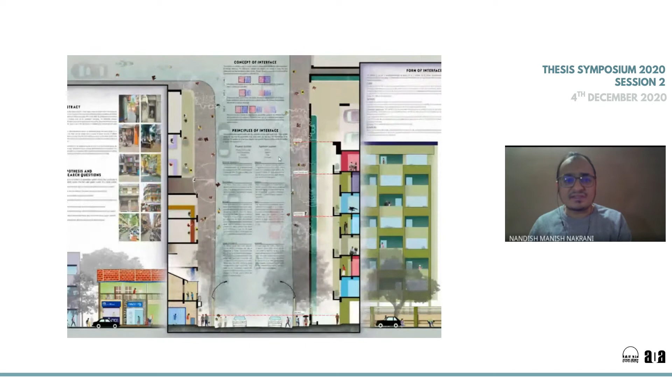The next step was to get onto a site and really understand what the ground reality is, and how we actually feel around this kind of three-dimensional space. So I went around a lot of areas in Mumbai to visit them and get a point of view of that space.

There's a set criteria which I had to narrow down to select the site. This criteria was to have diversity of various user groups, functions, architectural styles, and communities, and different eras of buildings. Also, it would be nice to have buildings that are recently developed alongside ones that are almost in a dilapidated condition, to see how that building is still sustaining.

It should be well connected to the city with various modes of transportation, having a good network, and also be a prime locality for the real estate market, so that it would help me add value socially and commercially.

One such region is the Girgaon and Kalbadevi area, adding on to it the Bhuleshwar side on the eastern side. I happened to visit all these areas over a span of about one month, walking on the streets almost every alternate day, getting to understand the essence of the site rather than just mapping things.

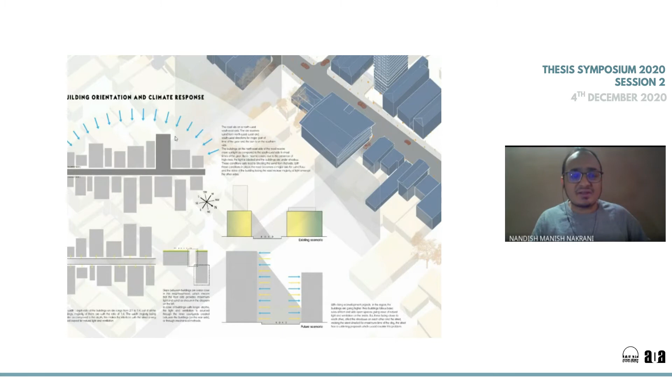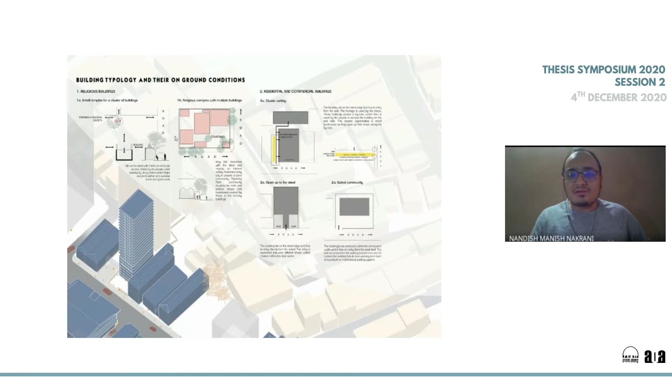So I conducted a few studies regarding the building orientations, because a lot of buildings there are quite close together and affecting each other in a very effective manner. I also looked at various typologies of the buildings, how their ground conditions are, how the clusters are, and how the building entries and exits work.

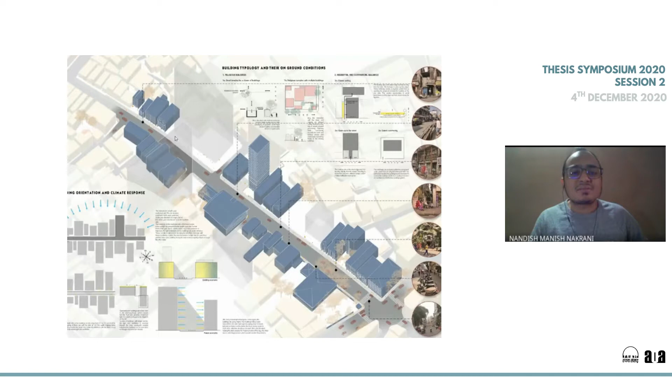And these are some of the visuals from the site. You can see this particular patch is a narrow street. It's a one-way road with not a lot of vehicular movement, but in peak hours there can be some congestion.

Adding on to it, some other characters of the site regarding the shops and temporary vendors, and the character of buildings on the ground and above the ground. I also spoke to a lot of people over there to get their point of view, like the residents, the people working over there, the pedestrians, shopkeepers, and the motorists.

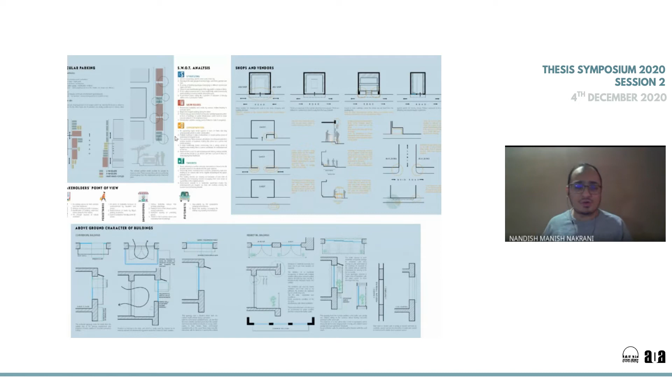The next step was to narrow down on what to do for the design, because up to this point I wasn't really clear about what the program would be or what the design would look like. This was during the end of the semester, and I really struggled to get to this point.

The main thing was to have an urban intervention on the street, as to how an interface would help add value to this site.

So I looked into the issue of road widening, because I was reading a lot about road widening schemes around the city, what their effect was, whether they were really effective, whether they really worked for the people, and how specifically it affects the interface.

According to my analysis, road widening is not actually a good idea to have a positive effect on the interface, but it really mellows down the interface and the activities around it.

So I went on to address that, and to look at an alternate for road widening, and how to add another layer of transit onto the street.

So the interface would be an element which would help with this, which was a bridge that would connect all the facades of the buildings. It would go along all these buildings along the street, adding another layer on top at 6 meters, clear from the ground, and all these activities could happen on that bridge connecting all the buildings.

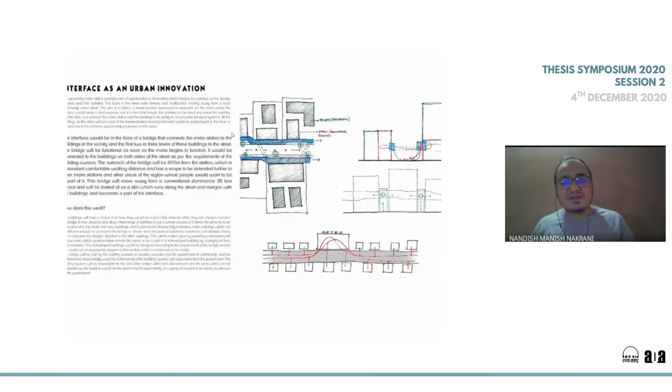So these were some of the strategies and policies which would work there, as to how the buildings would get into this particular scheme.

So how this happens is this bridge will particularly start as soon as the metro commences, metro line 3 commences. Till then, whichever buildings are redeveloping over there, which is already taking a lot of pace, these buildings will redevelop with this patch of the bridge with them, and this would create a stretch of this bridge on the street.

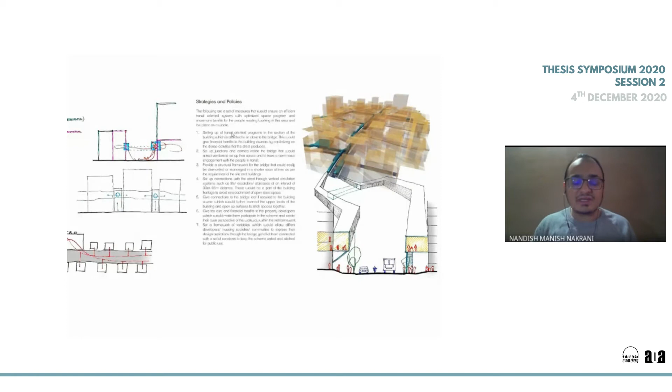And if the buildings do not want to redevelop, there can be some temporary installations or temporary connections. So the scope is around the Kalbadevi and Girgaon metro station.

And the analysis which I would suggest is a really important thing, the triple bottom line analysis, which would really help you to get into the basics of the scheme.

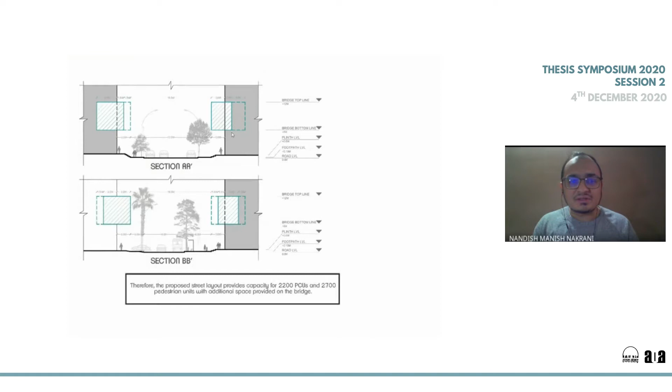There are some calculations which were required for sizing the bridge - what would be the width, what capacity it would cater to. And some of the constants which I myself, the designer, would set, and some variables which the user or developer would set, which is really important to give direction as to how this entire scheme would come up in this place.

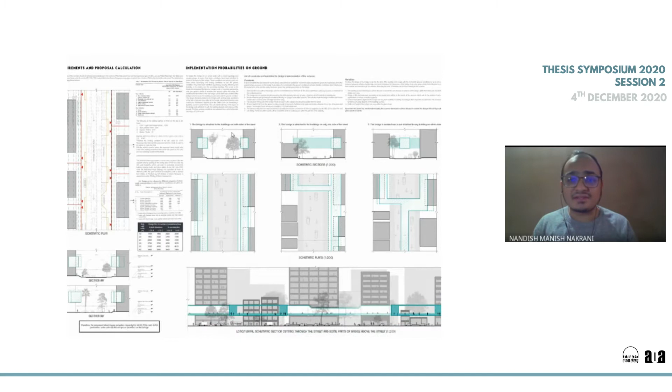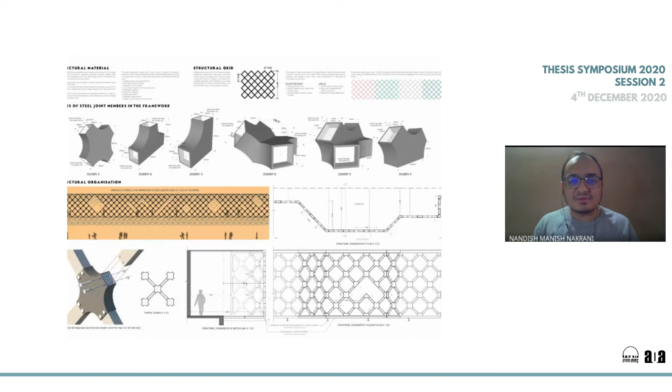The next part was the architectural intervention, detailing how this bridge would connect with a particular building on site. I thought of the site as a thoroughfare between two different lanes, and how I could create small lanes, by-lanes, and courtyards in between. In this patch between the two metro stations, new metro buildings are coming up, so this patch was ideal to cater to this situation between the main street and the rear street, acting as a thoroughfare in between, and also clearing out this spot for vehicular interchange for the upcoming metro station.

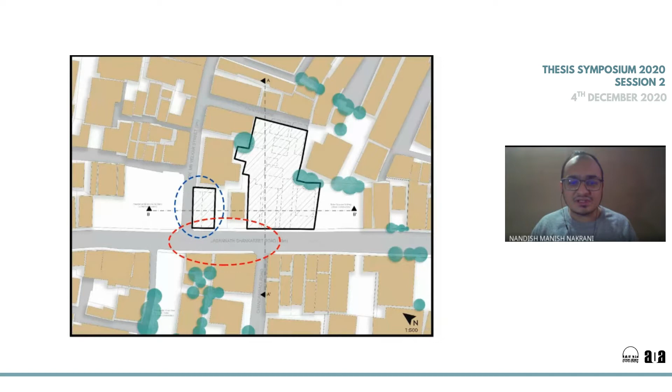This particular intersection was catering to a lot of pedestrian movement, because people coming from the top were going towards the station and vice versa, so this was a prominent junction. I had to redevelop a few buildings, take them down, and put up a new building there. These are the details.

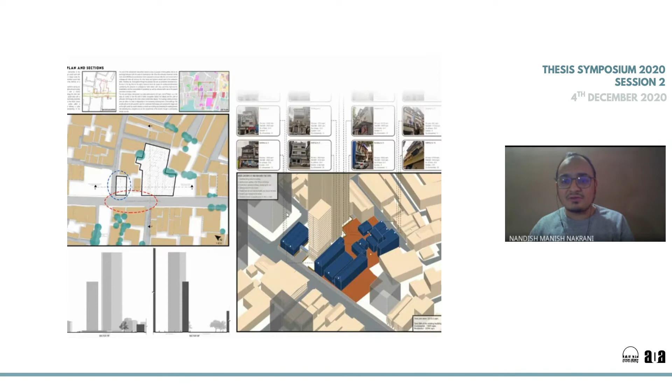The program was to have a clear idea of how and what I would do on site. If you're going for redevelopment, there has to be a strong reason, because redevelopment is already a big issue—people have divided opinions. So I had a good conversation with a group of residents to get their point of view, and set a framework according to their requirements, and set a few design goals carrying forward the principles of interface and my objectives of redevelopment.

Along with some zoning and massing strategy, the idea was to have internal interfaces, narrowing down the interface to the smallest occupiable space from the street, not just focusing on the two fronts which are there on the site.

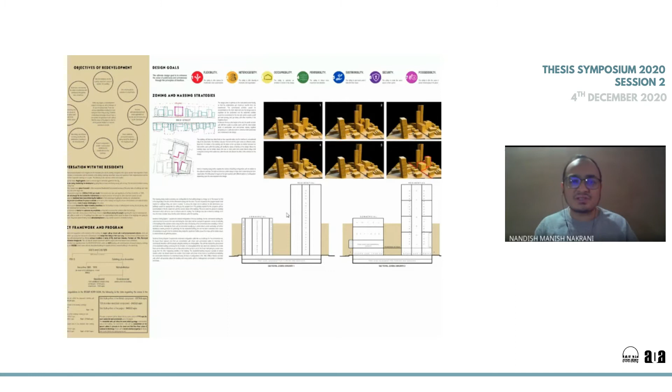The building at the bottom is a commercial building, and the building at the rear is residential. Having a commercial front on the main street, where metro station related activities would happen, gives them an advantage, while the residential building is in the rear part, which is more private towards the rear side.

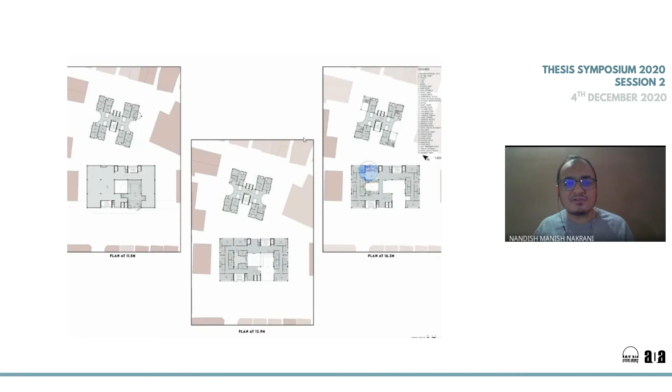A few more floor plans. You can see at the bottom the commercial building—the organization was to have terraces in between to break down the form and create interfaces towards the internal side, not just focusing on the external street side, and the same applies in the residential building as well.

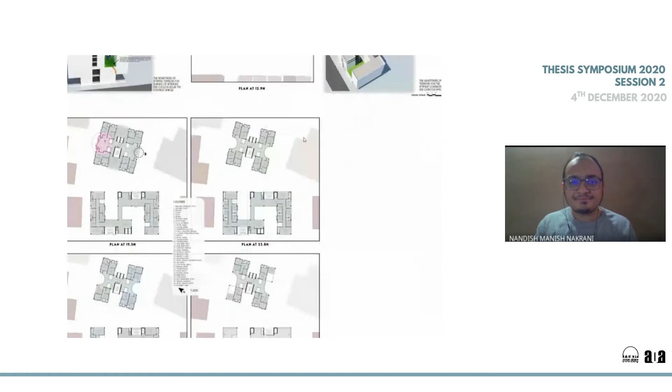A few details on the edges which would add value to the smallest of occupiable spaces. These are the floor plan units.

You could see the building in front on the main street—there's a bridge cutting through the front part on the first floor, where all the retail activities are happening. So on the ground floor and first floor, all these retail and commercial activities are happening for maximum engagement, and on the upper floors there are offices and the two-star hotel on the top two floors, with the residential building on the rear side.

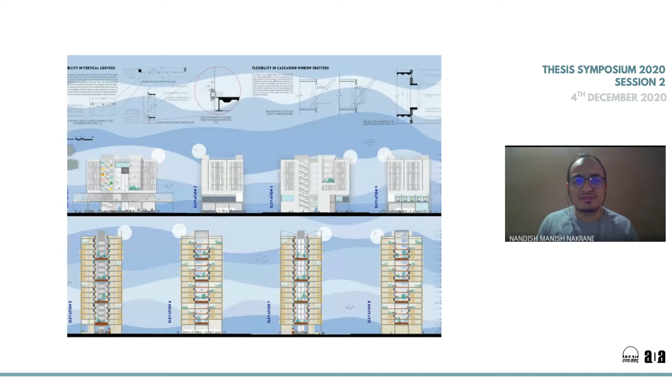The elevations and a few details to the facades. That's it—now it's visible.

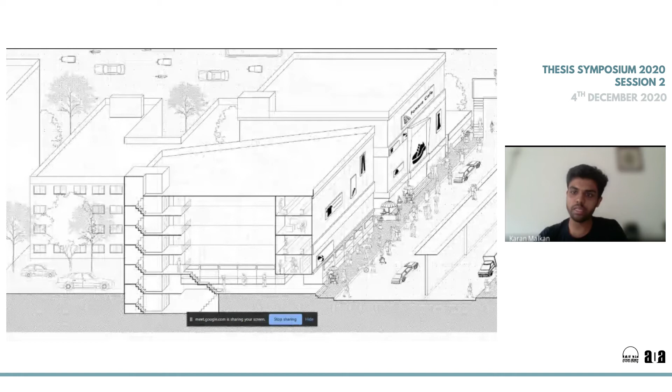As you can see in this graphic, the difference in the utilization of space in the malls versus the shopping centers or the streets is such that if you see the use of space on SV road compared to the so-called malls - the second and third floors of the malls are now being used as coaching classes or warehouses, whereas the shopping centers, with homogeneous shops on first and second floor, have still retained their footfall and high density and public interest.

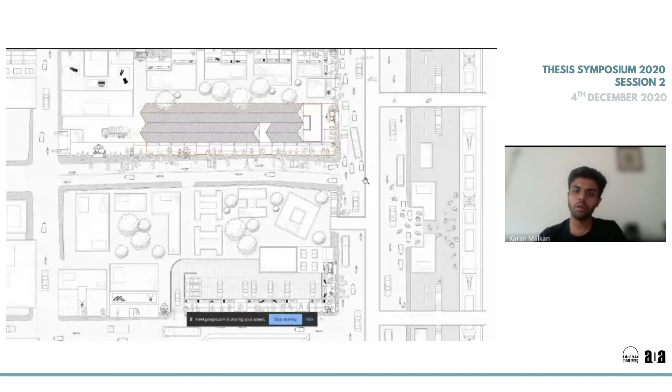Also, around 10 years ago, the site saw the development of a skywalk, which has been very redundant and less used because of its cramped entry-exit points and poorly designed, less efficient space. The thesis looks at redevelopment of the BMC market, which was constructed in 1951 - around 60 years old, in a very dilapidated state and in dire need of redevelopment.

So, through the entire study of the retail production and consumption cycle along with the analysis of this site, the thesis intends to appropriate this vegetable market and apply all of the learnings.

Moving on to the proposed programs for the intervention. The first primary set of programs includes rehabilitating the existing market programs. The market has a fixed number of vegetable shops, fruit shops, cutlery shops, fish market - all of the existing shops that are being redeveloped.

Also, the market lane - since it is a 60-year-old entity - the area has been identified as a market lane and hosts a lot of hawker activities. So the hawkers are also a part of the urban fabric and cannot be neglected.

Along with that, on analyzing the various other built forms and activities, I have proposed a set of programs that are coherent to the site, such as roof gardens, cafes, food courts, proper unloading and public toilets, along with a flea market on top.

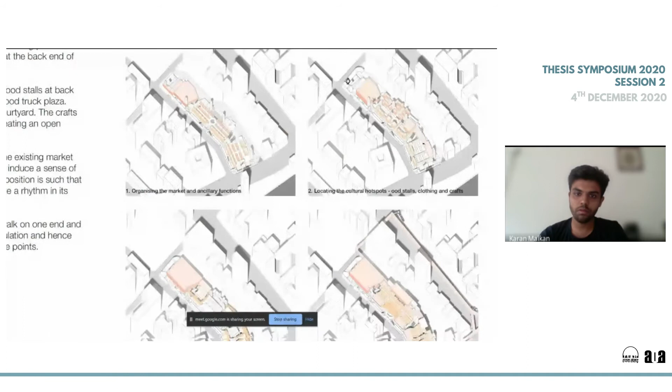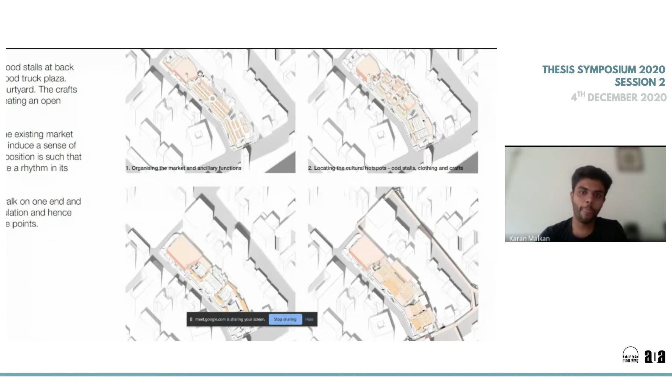So this is the conceptualization of spaces. On the ground floor, I have organized the existing ancillary functions and the market functions, such as the vegetable market, the fruit market, and the fish market, and created an alternate lane at the back so that a continuous thoroughfare has been created on the ground, with open plazas that intersect both of them, and a proper dedicated loading and unloading area at the back.

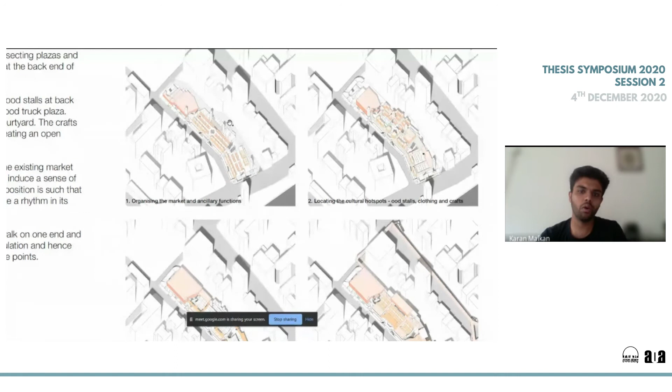On the first floor, I have provided a continuous thoroughfare with entrance and exit points, and located all the food, clothing, and such secondary public programs on the first floor.

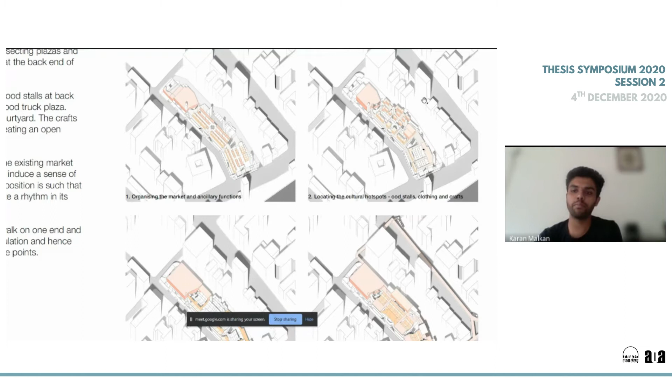Moving on to the second floor, I've provided the workshop areas, categorized into two forms: tailoring workshops and crafts workshops. From the study of the site, every clothing shop, mobile shop, or repairing shop usually has a back-end workshop area. For example, in a clothing shop's false ceiling, you will mostly find a darji, or tailor, sitting and doing all the altering work. My idea was to appropriate that space, because it isn't a very appropriate space in itself. So I thought of modulating the existing truss forms in such a way to craft space that can hold the workshop areas, and through that modulation of trusses, I've accommodated such space.

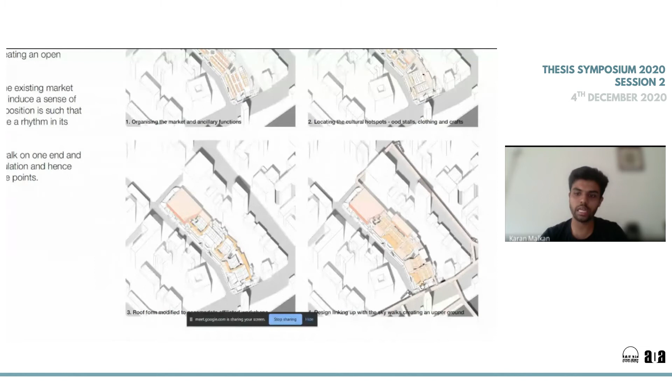And on the top, as I mentioned, I put all the ancillary public spaces, creating a thorough loop with the existing skywalk, and creating an upper ground.

As I explained, this entire central portion is the redevelopment of the existing market space with increased area and increased efficiency. At the back is a second thoroughfare, which handles all the loading and unloading during the day, and during the evening can be used as an evening food truck plaza and public forum. The market lane and the rear thoroughfare lane are intersected by two courtyards and plazas running across.

The whole idea behind the design was to maintain public influx in and out, because the study also suggested that while the ground floor is always active and functioning, the moment you create an entry and exit blockage and make people go up to the second and third floor through one point, the design chokes up. So while designing, my whole purpose was to maintain fluidity in the design.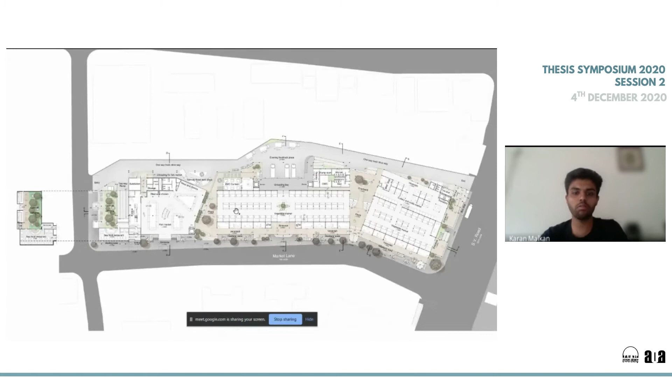Also, a small design detailing aspect was to provide a seafood restaurant and its kitchen right adjacent to the fish market, so that the art of buying a fish is accompanied by the art of cooking a fish. So even though you only intend to buy something from the fish market, you see the same thing being cooked in that kitchen, and that stays and registers in your memory. Eventually, even if you don't intend to visit that seafood restaurant, you end up thinking, let's check that out, because the kitchen was good, the art was good. So it's about generating businesses through memories.

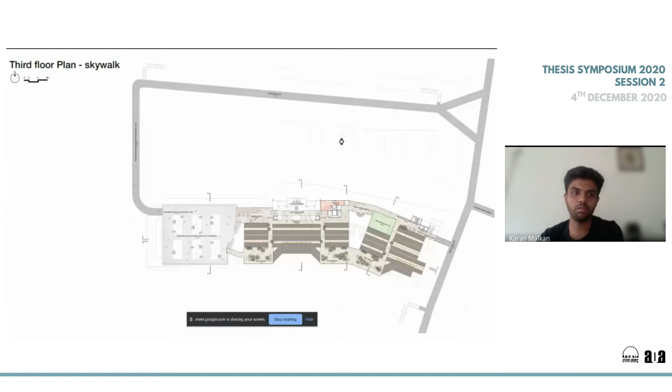Moving on to the first floor, it is entirely dedicated to ancillary public activities, where there is an anchor restaurant with its kitchen, homogeneous food courts, an overlooking terrace corridor loaded with clothing shops, and also a crafts market at the entrance.

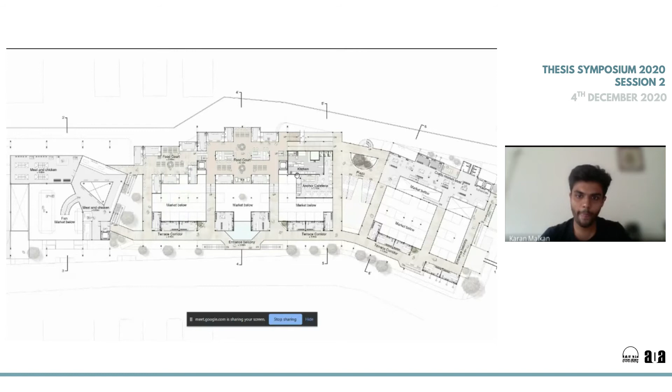On the second floor is where the public, target functions come into place - the workshop areas and reading centers. The workshop areas are located right above the clothing shops, so the hierarchy of the darji sitting in the false ceiling above the same shop is still maintained through a trap door, but now the space is appropriated for that darji also. You can see the truss form has a cutout.

It's an override of the market. So from the market you can still look upwards and notice that there are people working over there. So even if you don't intend to visit that space, it gets registered in your head that someone is working there.

So when you actually need to buy something or get something altered, you know where to go, or if connected on the online platform, you know where the existing physical form of that place is.

Along with that, this floor also holds some ancillary functions such as reading centers and gaming centers, because the site also holds a lot of coaching classes and such student-centric activities due to its proximity to the railway station. So practicing CA or MBA or other professional students can use this space to sit and read for their exams.

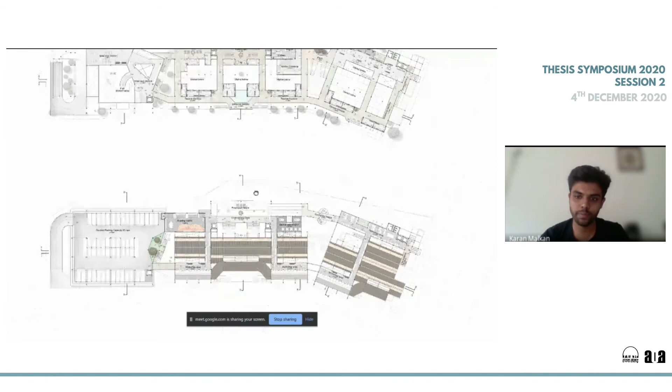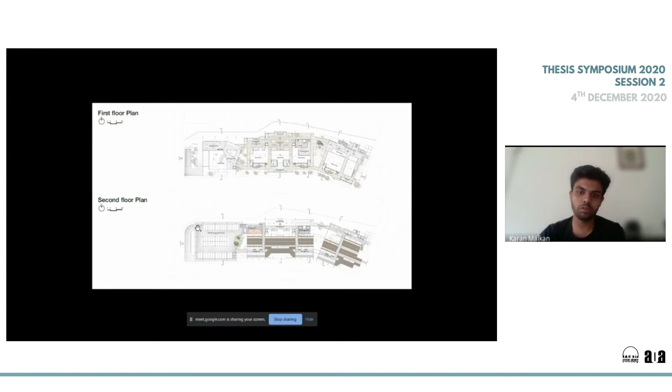Since this portion of the site was demarcated as a parking lot, on the second floor above the ground I've provided a public parking space that gets looped to the public floor and the skywalk above it, still keeping the integrity of the public flow in place.

Moving on to the top layer, the upper ground - the idea was to solely create large public gathering spaces, such as the rooftop flea markets, roof gardens, public sports areas, and a creche for the kids.

The whole idea was that the food court is on the central level, the public activity zones are on the top level, and the shopping zones, the existing zones, are on the ground and first level. So the hierarchy of spaces was maintained as such. I'll move on to the sections - it will be much easier to explain.

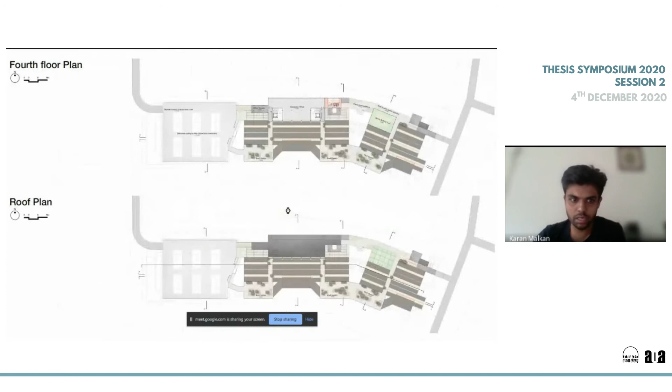In this section you can see the space dynamics between the spaces - this is the road, there is the entrance veranda and the hawker zones happening over there, and you also have an overlooking corridor that looks over the spaces.

In the center is the existing market space. Onto the right is the unloading that takes place during the morning, which changes its dynamics to an evening food truck plaza. Overlooking that, and in relation with the vegetable market, is the central food court space at a split floor level from that.

In this section itself, at the top, you can see the distribution office, which was intended to provide an emphasis in the form and also link the whole thing to an online platform. Also, in all of these sections, the trusses you see are the existing trusses salvaged from the existing built form of the market.

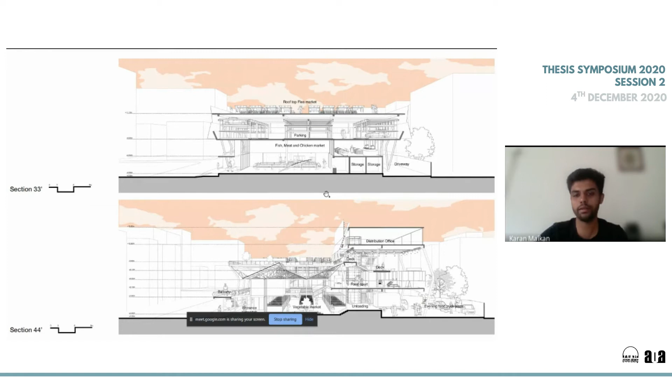So, in order to craft the workshop spaces, the trusses were used in such a way that a small tiny space is also magnified because of the angular form of the truss.

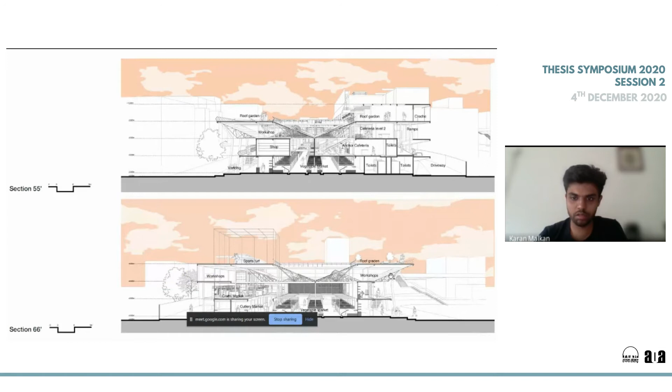As I mentioned, the workshops and the shops have a vertical interface, and even when you are shopping from the ground, you can have a look at what is going on at all levels, so it gets registered in your peripheral vision and memory. This section explains the same thing.

This is the circulation diagram, where everything I've been explaining comes to a loop. The entire circulation is designed in a circular loop, where you can enter through various points and exit through various points - there is no single entry point and single exit point limiting the movement of people. You can have a look at this.

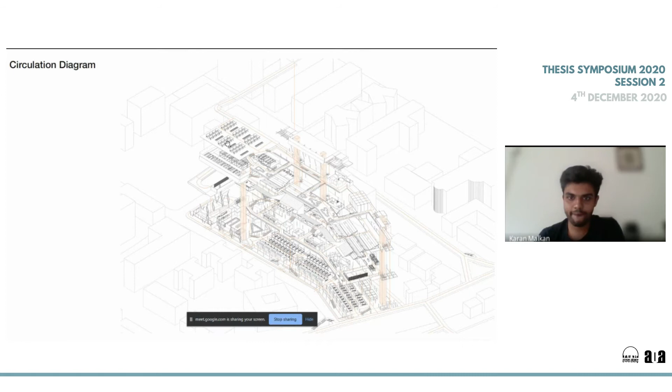This is a holistic isometric view of the entire design in response to the neighborhood.

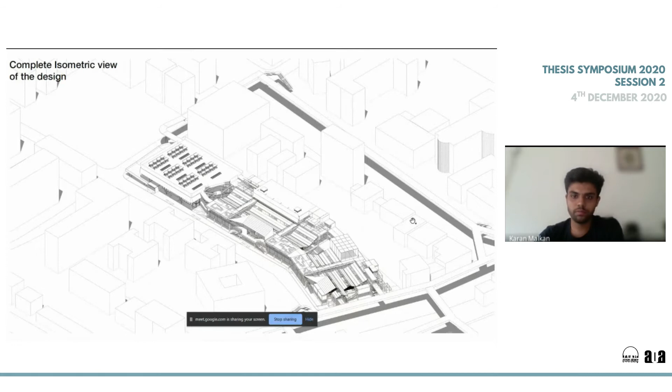So these are a few shop details. Everything in this design was kept modular so that it can change as per the functions during the times and its uses. So all the construction is done using MS box sections and MS sections.

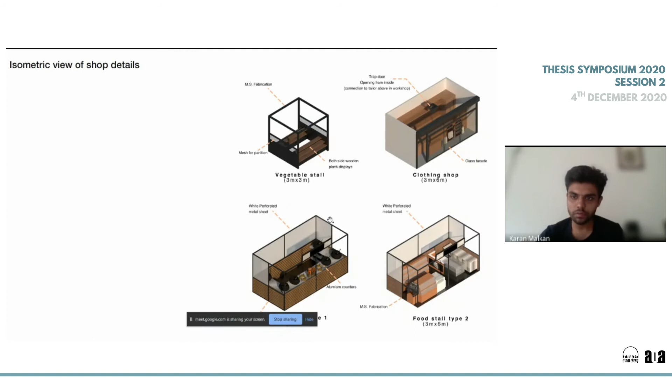So let's move on to the details. This is the primary detail where I've used the existing trusses and modified the spaces of the workshop and the facade, and created a form for the facade.

So this zone accommodates the hawker zones and provides a shade for the same. This zone becomes the veranda for the ground floor shop fronts, and this zone becomes the veranda for the upper floor shop fronts, while maintaining a common interaction between the ground and the first floor.

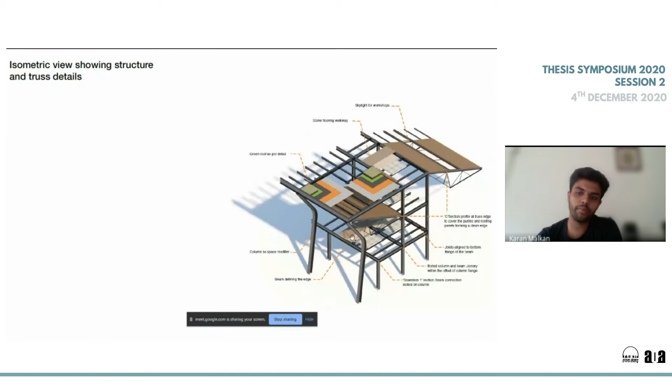So this is the WD detail for that. Moving on to some other details.

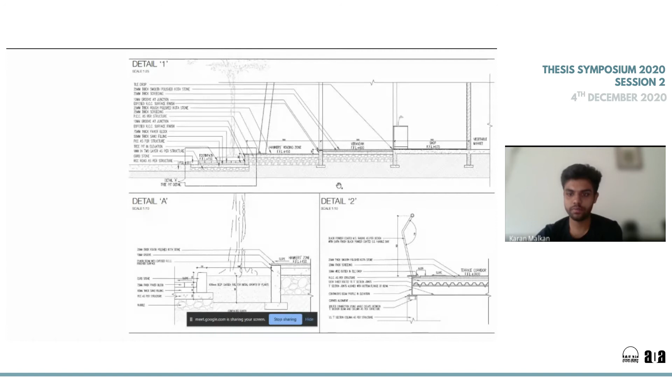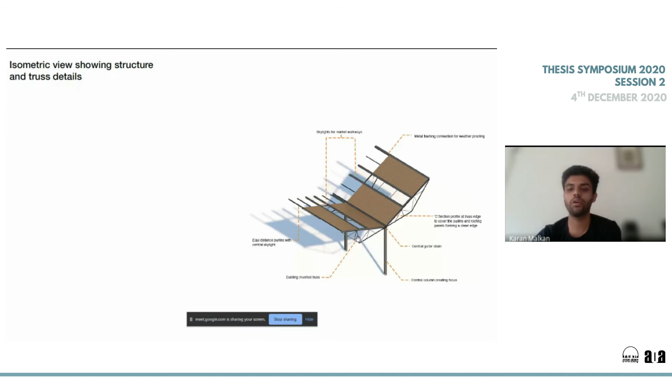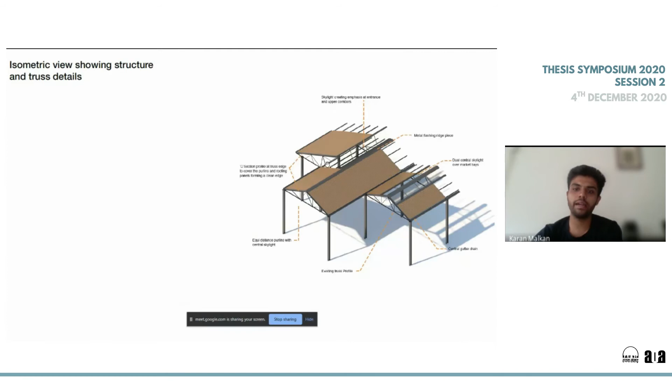More joinery details. This is the central truss modulation detail for the market, where skylights have been incorporated. This detail is created at the entrance to create an emphasis on the north light.

Yeah. So yeah, thank you.

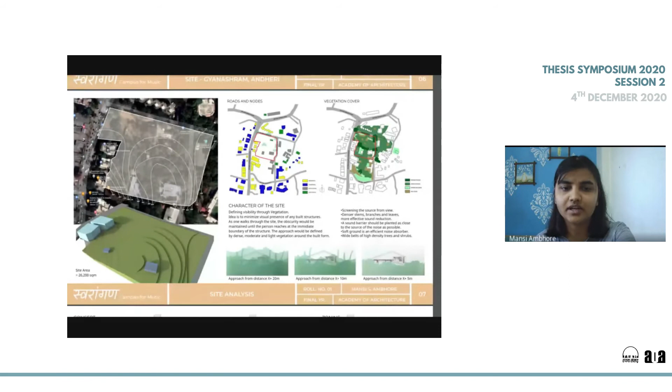And it's also a heavy contour site, so that was one approach that could help in soundscaping or landscaping of the project - I could benefit from that. This is just a general study and character of the site, of how the site is now.

This was my basic concept of a hand pan drum, and then that was divided into public and non-public spaces, and the design was placed according to that.

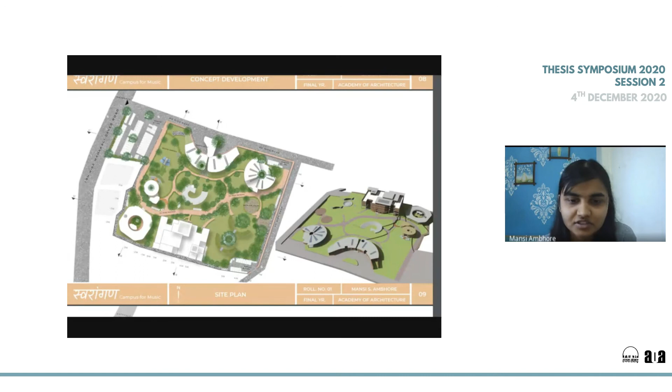This is just - I'll brush through this. These are just plain plans.

One general tip I would like to say is, if you're taking music or dance or any other art form, don't just boil down to one - don't restrict yourself to one function, like 'music, so we'll make a music institute.' I'd say this won't be a very right approach. Don't restrict to a function unless you have studied all about the physicality of music, or the aspect of your chosen topic.

Yeah, these are just plain sections. You could have a look at these later.

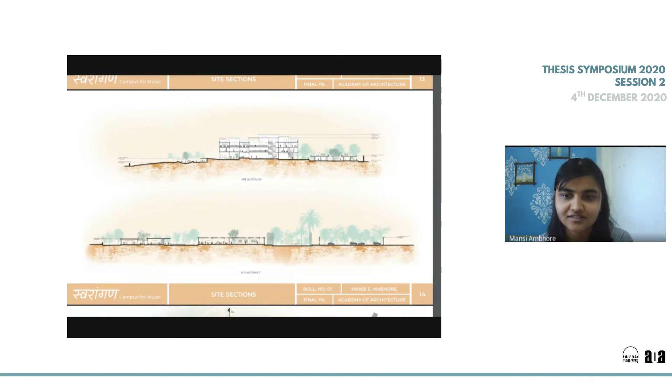Also, one important thing that I faced in a positive way during my whole thesis process is that your choice of guide affects your design, right? It has a positive effect on your design.

Don't choose a guide just because some professors might give you a good ranking or are lenient that way. That won't be the right approach, I would say. Choose a guide depending on their knowledge of your topic, that's important. And if some professor's way is such that you're not a regular student and don't like to show work every week, don't just show something to show that you've done work that week.

You could discuss with the professor and shift that flexibility should be there, so that you get your own space of mind to properly think about it, and not just produce work technically. You need to be passionate about your project, and that's that.

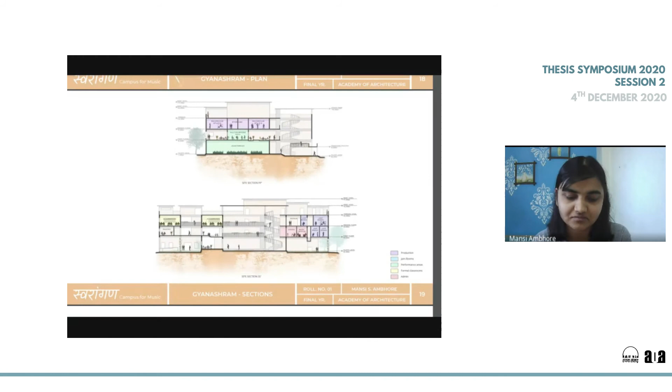Yeah, that would be all I'd like to say. Thanks a lot, Mansi, it was very insightful. Okay, do we have any questions for Mansi?

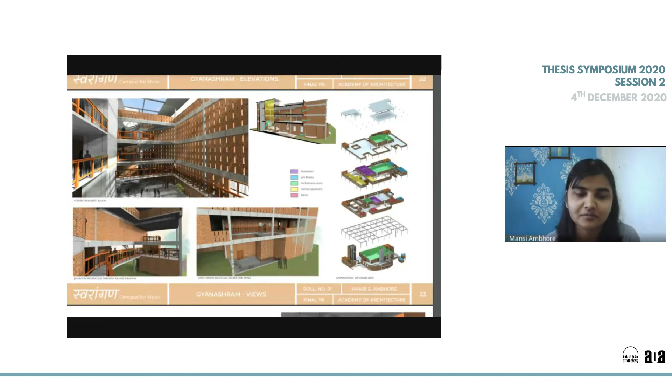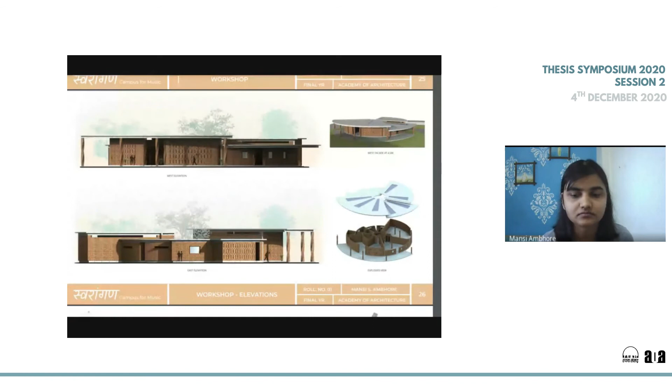I just have a comment. Very nicely done, Mansi. With a lot of sensitivity and humanness. Well done.

Did you have... maybe there is a related question. How did you get to this? How did you come to this topic, this subject?

Right, so like I said sir, music has been a part of me from a very young age. Actually, I had taken a drop for two years before my year of thesis, and then I worked as a photographer, a freelance and documentary photographer, where I was working with musicians.

Independent musicians majorly. That's how I got to know that, oh, this is missing, or this is something that we can have more of. So that's what I tried to propose.

Okay, so your approach is kind of indie as well. Yes sir, yeah. Well done anyway. Thank you, sir.

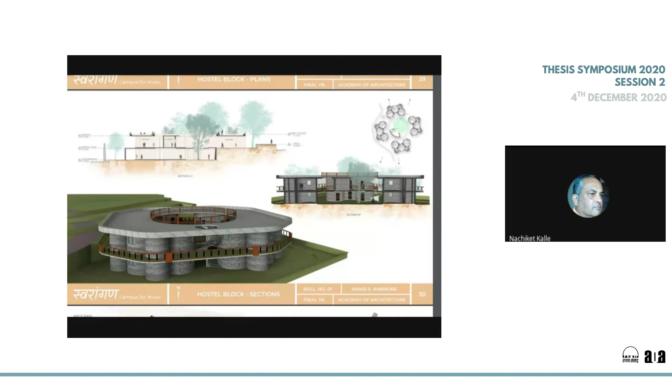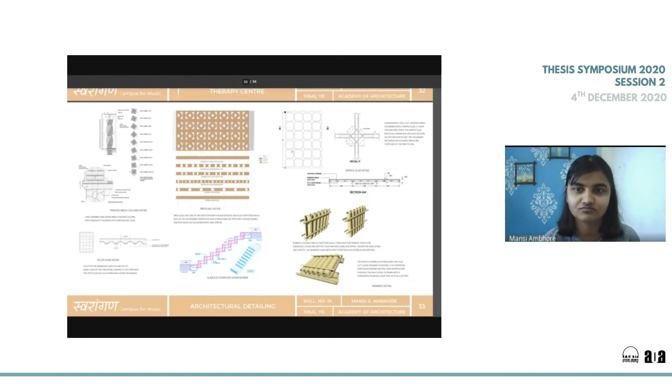Our final speaker for this session is Preksha Chheda, with her thesis titled Celebrating Mandvi. While romanticizing about its beautiful past and the built form that has developed over the years, the thesis curiously inquires about Mandvi's tourism-oriented future development plans. It's an action-oriented plan that refines Mandvi's own architecture for inclusive tourist plugins and does not define it into a clone-stamped tourist destination package to be sold. On a larger picture, the thesis addresses the idea of using architecture as a tool to package places as destinations to be sold rather than journeys to be experienced.

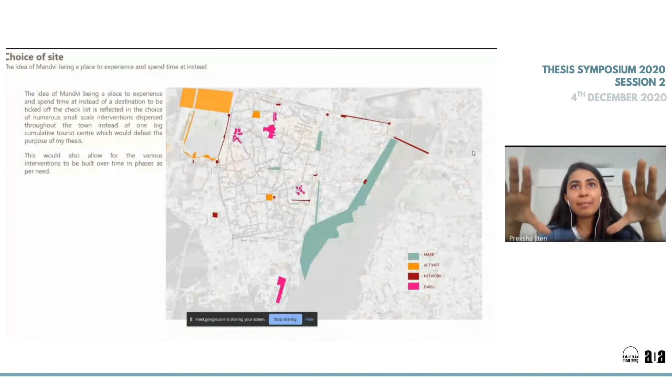Taking this action plan forward, I looked at the map of Mandvi and at very important landmarks that exist, categorized into the first 4 points of my action plan. Each site is basically of one category. Some is 'make', so they manufacture something because there are various crafts, be it clothes or mojaris, or some sort of packaging and things like that.

'Activate' would be sites which have gotten old but are very important to the people, and hence need to be reactivated. 'Network' were sites which helped people connect initially and now have lost their importance. And 'dwelling' would be the old merchant towns that existed, or the dharamshalas that existed onsite, which are now redundant because the merchants have moved out of Mandvi to say Bombay or Muscat or Dubai, and their houses are just redundant, but they are very beautiful.

So I thought the idea of looking at how to intervene at sites couldn't be very typical, like creating a site criteria list and this and that. Rather, be very organic. I saw numerous things on site, and I just organized them into 4 categories and marked them all over.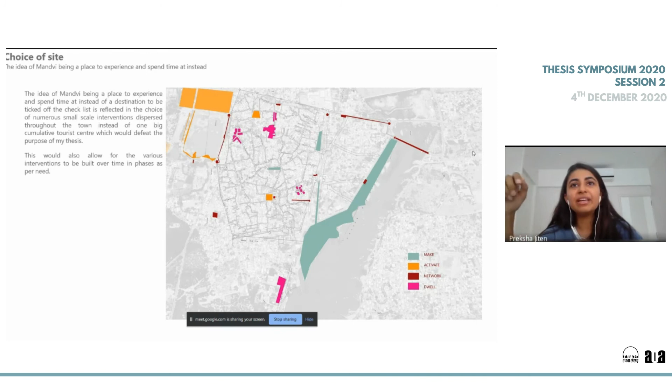Now for the purpose of my thesis, it was very difficult for me to make a design intervention everywhere, because that would get tedious. So for the purpose of demonstration, out of the various sites, I picked up 4 particular sites.

For the make category, I chose the act of shipbuilding, which happens out there and is a very prominent craft at Mandvi. To activate, I picked up the heart of the town, the market square along with the clock tower. For network, I chose one part of the ruined old wall. And for the dwelling category, I chose a dharamshala that existed onsite.

So that helped me form this red street that you see. It was all in walking distance. I decided to pick up 4 sites like this out of the many other sites that could be picked up later on over time.

The idea of choosing such small scale interventions was to be very surgical and just do what is required. If I don't need to break everything, it's fine. I would keep maximum that can be retained and add something over it. So I wanted to be very sensitive with the interventions, because I didn't want architecture to take over the whole identity of the space, but just enhance the identity of the town.

So moving on, I decided that whatever architecture I do, be it 5%, 10%, 20% or 100% within a site, it should act mainly as a negotiator between the visitors of the town and the locals of the town. It shouldn't be a big barrier or some gated thing or anything of that sort. It should just be a negotiator where tourists can subtly percolate into the everyday lives of the locals out there. So these are some of my design criteria which I looked at for the same.

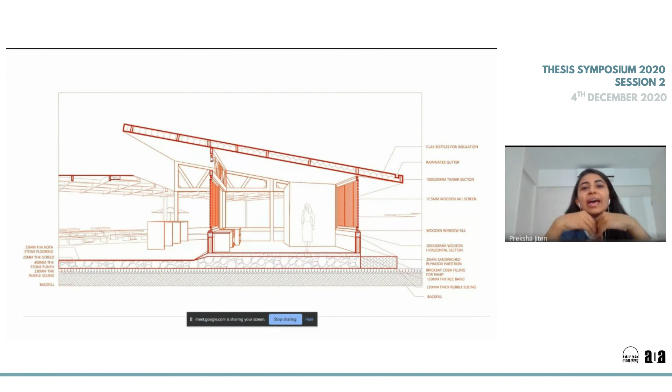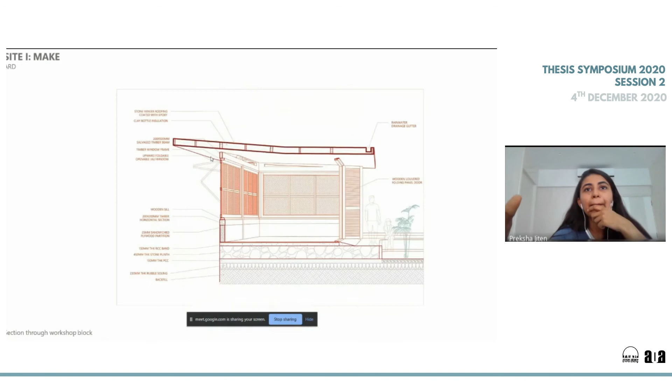Moving on to my next site, which was basically the idea of activating the old Market Square and Clock Tower. It basically resides in a very dense area, in the city center.

So I decided to retain certain parts, like most of my market is retained. All the stone columns are existing as is. I just intervened in a quarter part of my site, cleared up the courtyard, activated it by making interventions so that it could host a flea market. I broke down the compound wall around the clock tower, made it a little plaza, and connected it with a pedestrian pathway right next to it, where I designed vendor seating and a cycle station.

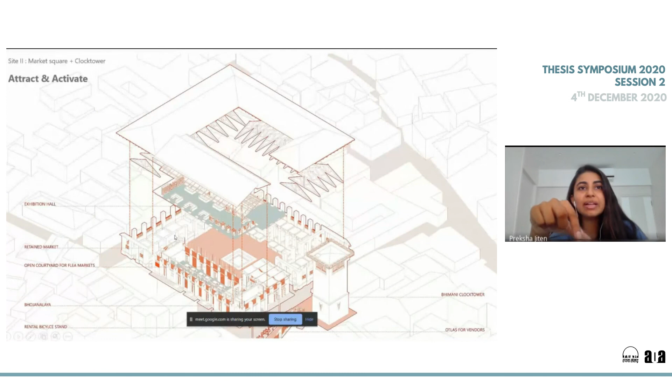The ground floor hosts a Bhojanalaya and the path I've intervened, and the first floor hosts an exhibition hall. How I've come up with the programs is also because currently that part of the building was redundant. The idea of adding a Bhojanalaya would be to let people actually eat what's very local to the place rather than having a fancy restaurant with people serving you. This would be like you take your own thing, like a buffet, and even regular locals can go there and eat their own food.

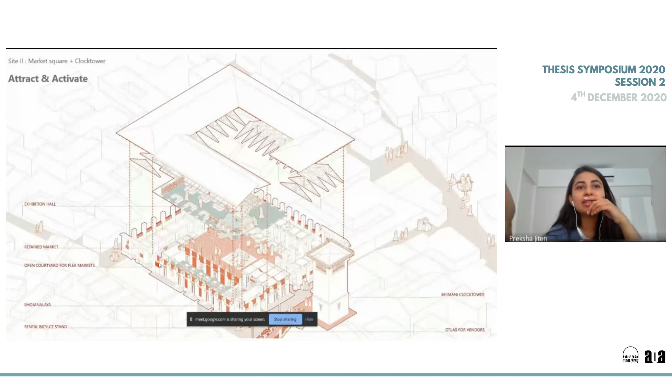Similarly, the exhibition hall would be a place which would host different exhibitions, be it clothes like bandhani or batik or jutis or anything that the people in the surroundings make - they can come book their slots in the exhibition for a day or two, and then go back again. They would have a good host of audience as tourists as well. In this way, I imagine this to be a place where tourists would easily get into the life of the locals, especially the women and children who are the heart of this place.

Some drawings, some views - how the courtyard would look when activated. The Bhojnalaya and the exhibition area. The roof I have contemporized to be a steel structure which could easily and lightly sit onto the stone columns.

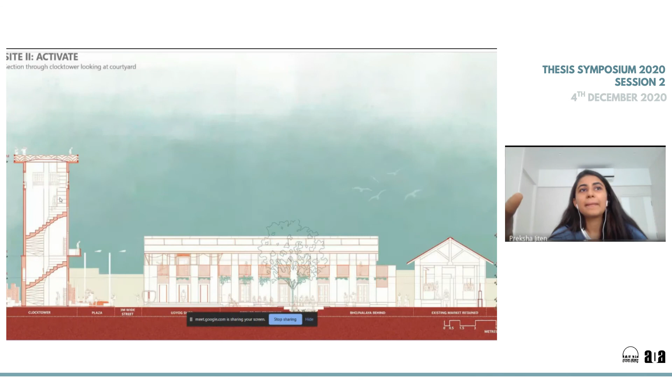This is exactly how the construction would happen, a schematic version of it.

The third site I intervened into was a broken part of the town wall, which was redundant right now. An interesting thing I learned about this town's history was that the town gates would be shut at night and open in the morning. So traders coming from the ship to the town would reside in the dharamshalas outside the walls, and in the morning could enter. However, these walls from the inside had, as you can see, columns forming an arcade where they had shops and houses as well.

So I decided to re-intervene that space, and rather than keeping it redundant, I added a bicycle stand because I wanted to promote the idea of slowly moving through and exploring the town rather than a typical touristy bus just looking down on the activities. I also activated it by adding some eating facilities, a small general shop, and a restroom. A very basic programmatic intervention, but the idea was mainly to activate the space and make it a platform where tourists and visitors could interact.

The second level, the first level, and this is how the top level would look.

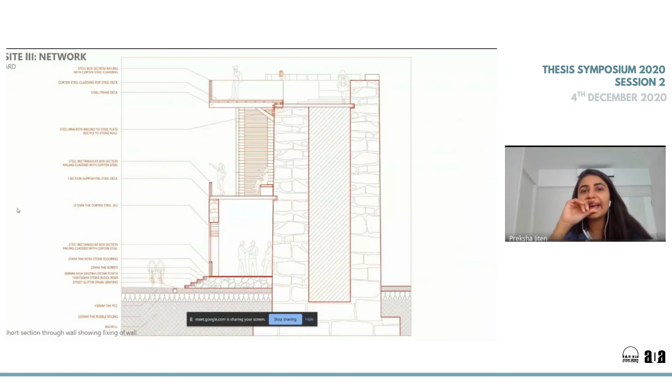The addition I did here was a corten steel deck added onto the existing stone columns, with a staircase in corten steel, decks, and flooring as well, that's all. This is how it would look once populated and activated.

The fourth category I was addressing was the dwelling idea. In a typical hotel you'd have a distinguished experience compared to the actual life of Mandvi. So I thought, rather than taking a blank slate and creating dwelling facilities for tourists, why not look at these old redundant buildings and just do new interiors, refurnish and renovate them, and make them livable.

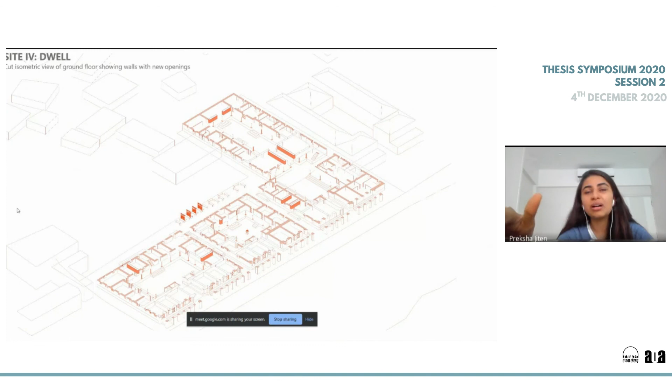So the idea was to strip down the entire dharamshalas diagrammatically and understand which columns needed strengthening and which walls needed to be demolished. Once those things were identified, I started a basic layout where I plugged one local family into each dharamshala.

At the same time, they would host 3 to 4 extra rooms for guests. This would generate income for the locals staying there, so they don't have to leave their own craft or profession to become a waiter or anything. At the same time, guests get a much more local experience. So there are a lot of common activity areas and such.

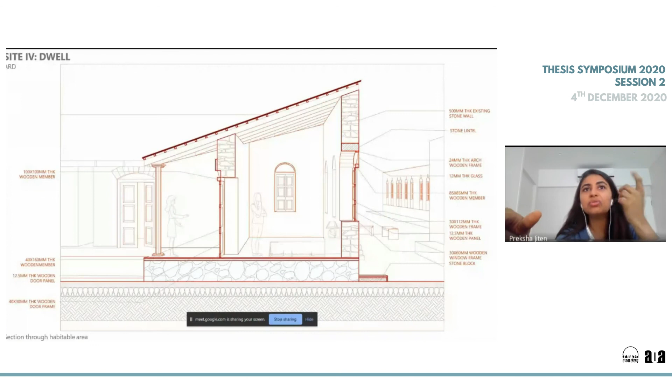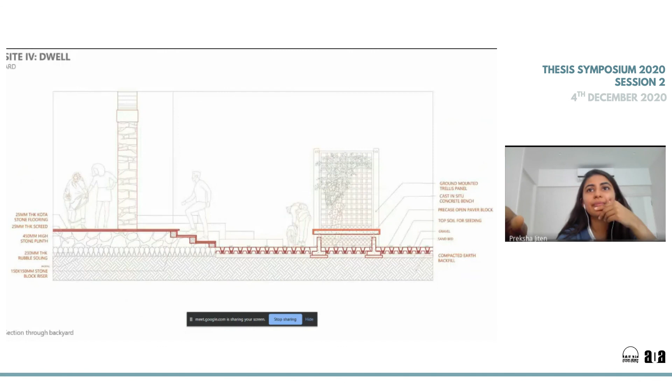So this is how I intervened in the 4 places on the site I decided on. However, this project goes way beyond these 4 sites, because they are just demonstration sites, as I would say. The idea is to basically value what we have at the site, and integrate our interventions and architecture very subtly into these places, rather than creating new, heavy interventions that would feel placeless. My approach really targeted refining whatever Mandvi has and celebrating that to the world for people to come and experience it. I believe that whether it's Mandvi, Raipur, or any other place, if we do interventions very surgically, we can develop a much more sensitive architecture for the same purpose. Thank you.